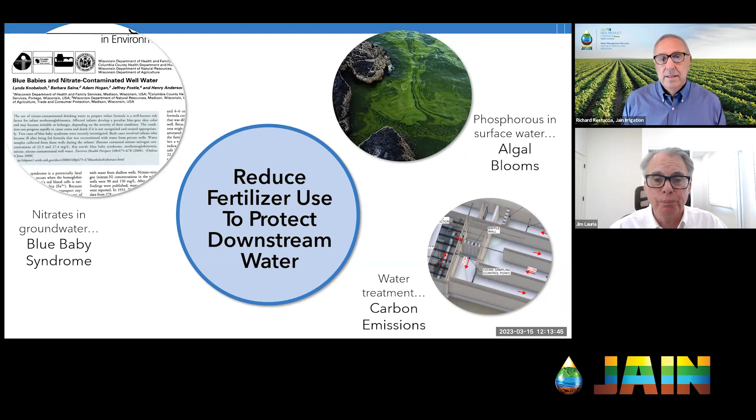So by doing what's right in the agricultural arena, you're doing a lot better job saving these kinds of things downstream, right? It's all downstream. So I think what you're saying is the cleaner we keep the water, the easier it is to clean up. Exactly. And the less expense there is to do that. Exactly, so less effort, less money, and less greenhouse gas emissions, right?

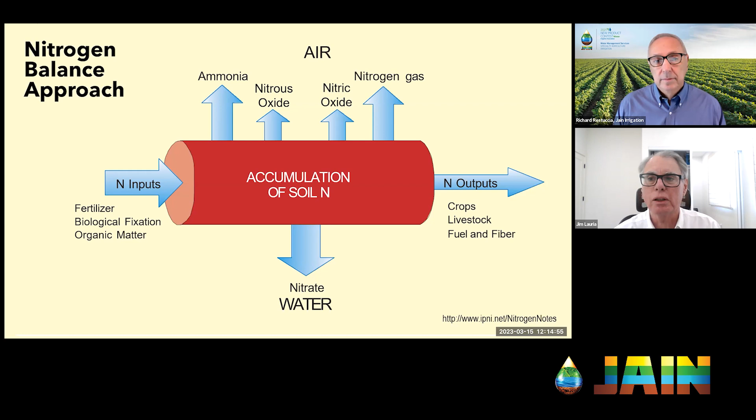So the other thing about greenhouse gases: we talked about carbon dioxide, which is by far the largest contributor to greenhouse gas emissions, but nitrogen's a pretty potent gas too. So you've got the nitrogen inputs to grow, you need that to improve the efficiency of growing, the yields, but not all of it stays in the plant. Some of it leaches out into the groundwater, and a lot of it is also released as gas via ammonia, nitrous oxide, nitric oxide, nitrogen gas. This can be pretty problematic because it's about 300 times more potent than carbon dioxide as a greenhouse gas.

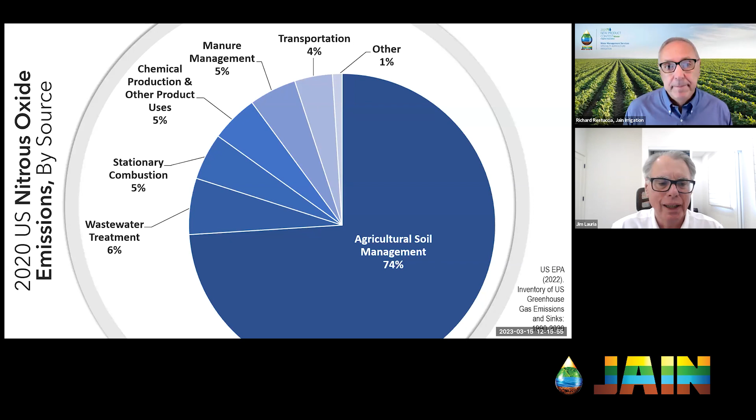So there's some effort on the use of oxygenation to really reduce the amount of nitrogen emissions. Going back to the 40s, W.D. Durrell said if we could figure out a way to efficiently oxygenate the root zones, we could really do a good job of helping reduce that nitrogen emissions.

So there's a couple of different ways to do it. Ventilation using a compressor, but that's difficult. If you're doing it dry, you don't get the distribution of the air, and it can be problematic to have a compressor out there. Chemicals, you can use hydrogen peroxide, but it's a strong oxidizing agent, so for two reasons handling it can be a little dangerous for laborers putting it into the system. But also, if you put too much in, you can end up killing some of the beneficial microbes, the bacteria that really helps with the uptake of the fertilizer nutrients.

There's nanobubble generating systems we've heard about most recently. They do a really good job of getting those small nanobubbles into water.

More suitable probably for indoor vertical farms. The equipment can be a little expensive, and also maintenance. If you've got them out in the field, they can be a little challenging to maintain.

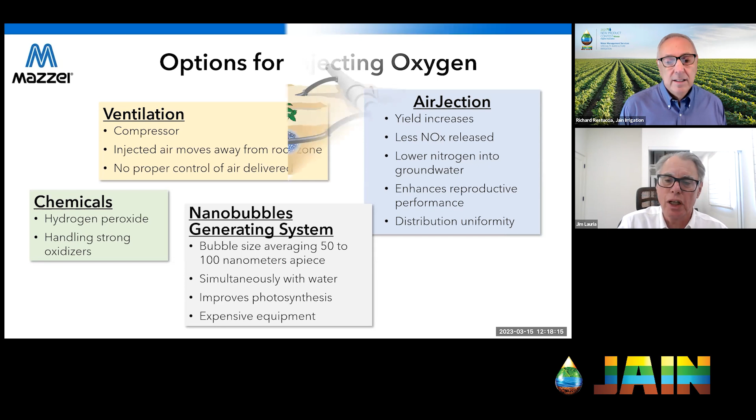And then what Mazzei promotes is AirJection. We've done a lot of work on the yield increases, reduced NOx. What we found is that by having good aerobic activity in the soil next to the root zone, you're doing two things: with the bubbles, you're breaking up the soil, so we call it plowing without a plow, but you also improve the dissolved oxygen. That helps the aerobic activity in the soil, better uptake. And also we found that it helps the nitrogen fixing bacteria become more efficient, and it's been proven that you're getting less nitrous oxide and some of the other nitrogen gases released using this.

So Jim, if I look at that slide just a little bit longer. So am I getting air injection in my irrigation just by using my Mazzei fertilizer injector? No, it's a specially designed Venturi. You want about a 10% slurry of air in there, and we design it around each flow rate compared to what you would have using a fertilizer injector. So a completely different way of doing it. We're typically doing it through manifolds to be more efficient.

It works the same way, right? Same, you're using a motive force of water to pull in, in the fertilizer case, liquid fertilizer. But when you're using air, it's a different interface. With fertilizer, it's liquid to liquid transfer. With air, it's gas to liquid. So a different technology—same technology, but a different way of doing it.

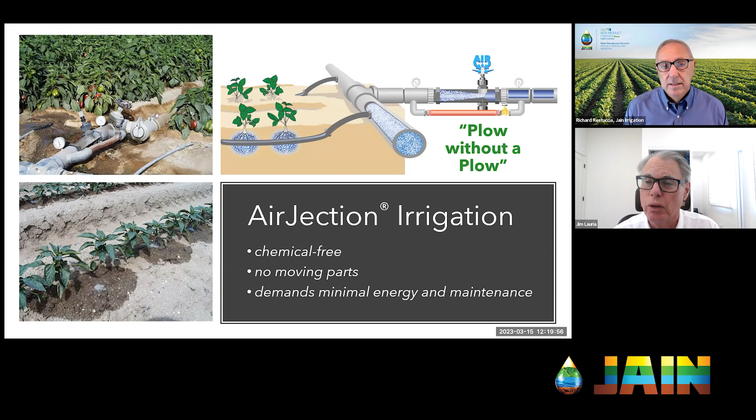And I can have both set up on my system, is that correct? Oh yeah, but you'd want to look at it—you got to look at them differently though. You would use fertilizer injectors exactly to pull in fertilizer instead of pumping it against pressure. So good advantages there. Great, thank you.

And then the other area that has an opportunity is indoor farms. We talked a little bit about that—crops that can be grown inside, will be at some point. We're looking at more tomatoes being grown indoors, green leafy vegetables, strawberries, and then one of the biggest cash crops of California is cannabis, and more of that's being grown indoors as well.

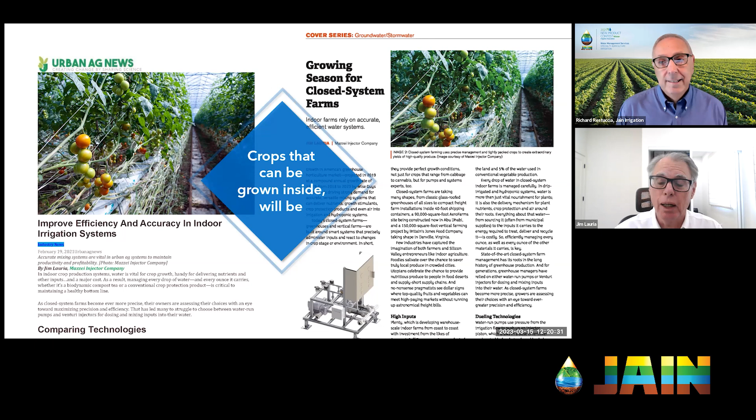So in order to properly manage the water, because you want to recycle every drop of water that's going in, there's some opportunities around designing systems like this where you've got filtration, you've got ozone. You want to definitely protect the root zones from any pathogens. And if you don't manage this water and treat it properly, you build up biofilm, which is a place that really harbors pathogens that can be really detrimental to the crops you're trying to grow indoors.

So interesting, right? They're capturing the extra water, any runoff from the plants, and feeding it back into their nutrient mix tank. Right, exactly. And you're treating with ozone for sanitizing to kill those pathogens, filtration to take out any of the big particles. So this is a design by H2O Engineering—they're one of our partners, they use our equipment in the design of their systems.

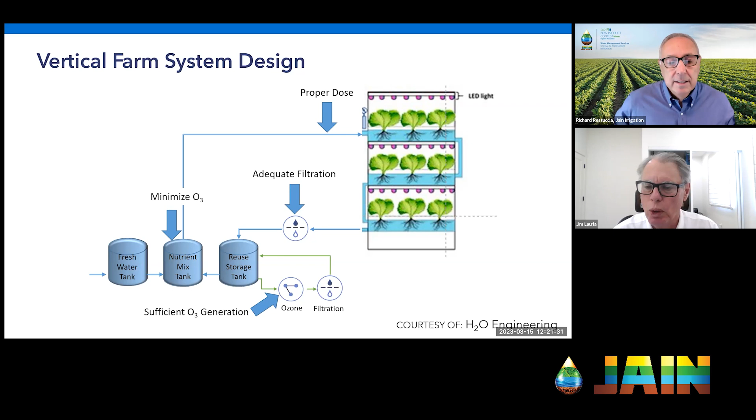Well, you can certainly see a lot of advantages for that. Yeah, exactly. And then, while vineyards are an important part of water use in ag in California, there's been some pretty stringent requirements by the state water resources about the runoff and about the wastewater coming out of the wineries, and so they're putting more pressure on them.

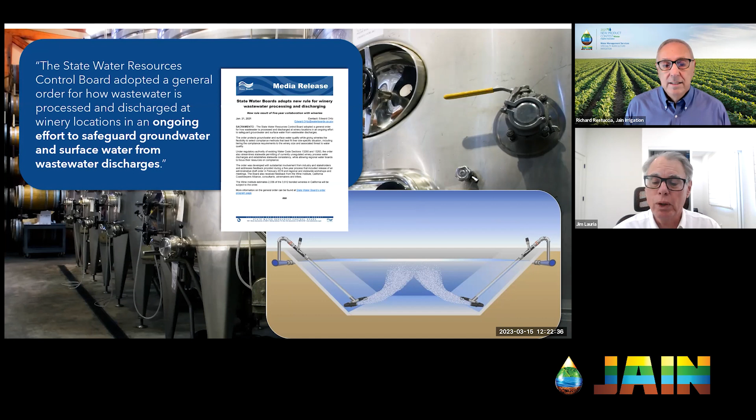And so we've got some applications where we use our Venturis to pull in air and our nozzles to do some mixing in these wastewater lagoons, again to help the aerobic activity so that you have better digestion of the wastes. And if you don't, and it turns septic and becomes anaerobic, you're releasing methane. So in terms of recycling that water and also reducing greenhouse gases, you really want to keep those lagoons aerobic, and one of the ways we can do it is with some of these injectors.

And we do a lot of work around CFD modeling, computational fluid dynamic modeling, so we can make sure the lagoons are properly mixed, that they're getting as much air in all the different areas as possible—not completely mixed, but in such a way that you've got most of the lagoon aerobically treated so that you're doing the best digestion of these organic wastes as possible.

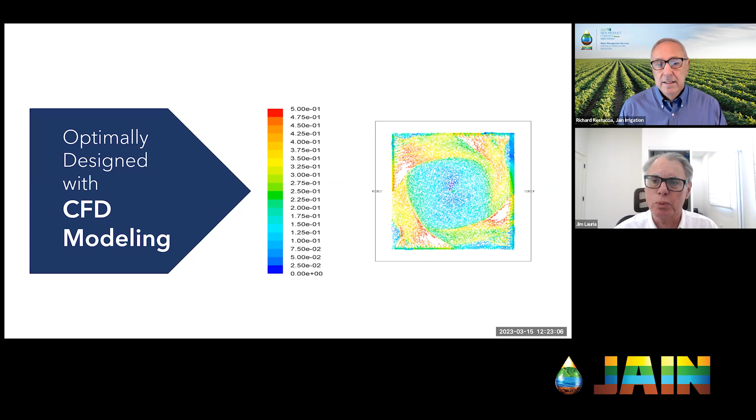Yeah, pretty interesting. Definitely in that high-tech area, right? Yeah, and we'll talk a lot more about that, the use of high-tech tools to manage some of the more simple aspects of water treatment.

Now, this is one of my favorite projects that Mazzei's been involved with, Pure Water Monterey, a groundwater replenishment project. And basically, this facility...

They wanted to, because they're on the Pacific Ocean, and this is going to be a kind of theme that we talk about going forward, as they're pulling more water up out of the ground. Monterey is unique because you've got residential people living there, a nice place to live. A lot of tourists come in during the summer. It's an agricultural community. So they're pulling water out of the aquifer.

And what's happening as you're pulling water out of an aquifer, because you're close to the Pacific Ocean, the coastline, you're getting saltwater intrusion into that aquifer as you're pulling more water out.

So this Pure Water Monterey, what they wanted to do was take a number of different wastewaters and treat them, and then put them back into the aquifer to keep some of this intrusion out, and also use this water for other applications, use it as source water for their drinking water.

And it was a tricky situation because they wanted to treat a number of different waters. They wanted to treat irrigation runoff. They wanted to treat municipal sewage. They wanted to treat water coming from a vegetable processing facility. They wanted to treat stormwater.

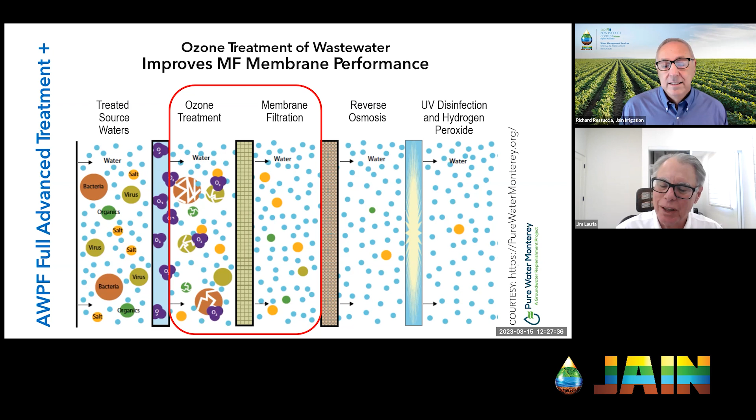I just want to remind everybody that the reason I asked Jim this is he is a chemical engineer, and he really does know this.

More and more I'm seeing places like Las Vegas or Phoenix, Arizona, where 90% of the wastewater is treated and used for ag or for drinking water. Their water rates are really cheap, right? Inexpensive, about $40 a month for a family of four versus $200 for a family of four in California. I think this is going to be part of the longer term solution to our water challenges.

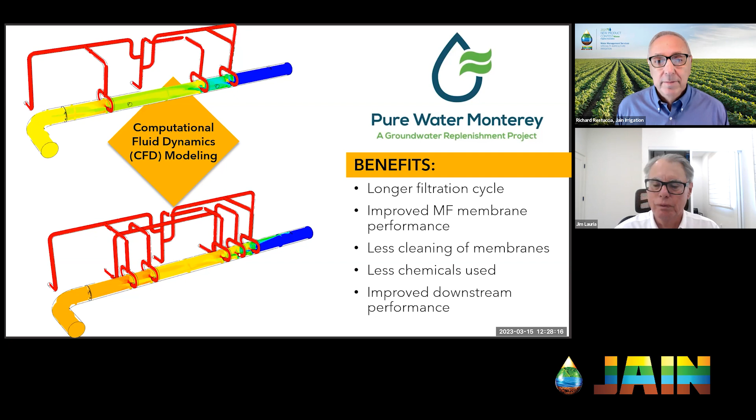As the first potable water reuse project in Northern California, it goes down into the Seaside groundwater basin, turning wastewater into a safe, dependable, and sustainable water supply. It's about 30 million gallons a day, a pretty substantial amount of water being treated. This is the equipment that was delivered by us for the ozonation process, upstream of the membranes. What a beautiful job there.

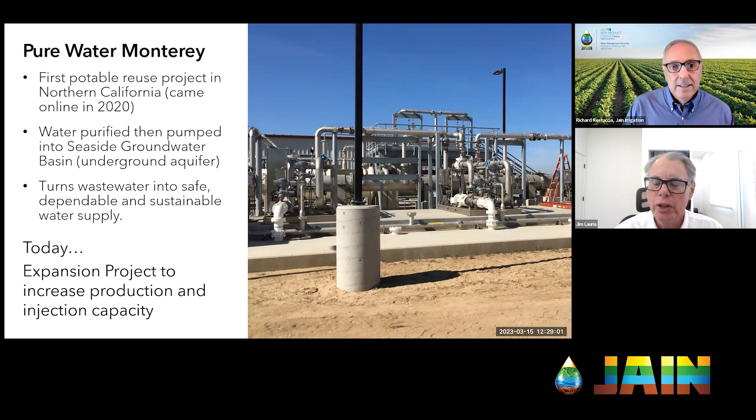There's an expansion project to increase production and injection capacity. We're already working on phase 2, trying to increase the amount of water that they can process, which is all good stuff.

Then there's Orange County. This is the largest water recycling plant. It's won all kinds of awards and has been around for quite a long time. I think presently it's about 130 million gallons a day.

Basically they're taking the municipal wastewater being produced in Orange County. They probably make about 350 million gallons a day, and of that, they take about 130 million and process it here to put it in the aquifer. The other portion they process well enough that it goes out into the Pacific Ocean.

They're trying to look at how they can do more of what they're doing with the replenishment. Again, it's a pretty sophisticated process - membranes, reverse osmosis, advanced oxidation - to make it as clean as possible so that when they bring it back up, they can turn it into fresh drinking water. It's just suitable for that. They're touting a number of almost 30% now, which is pretty great.

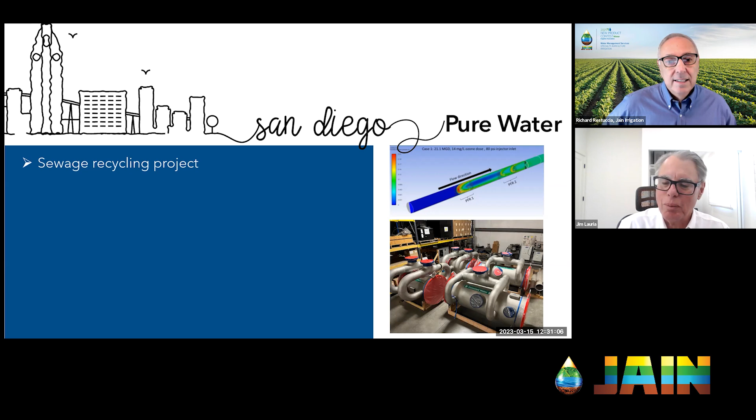But one of the things we can talk about, and one of the things I've done, right now it's doing about 34 million gallons a day of potable drinking water. We're looking at phase 2 to do 53 million gallons more. But one of the things I always like to look at is benchmarking what other people around the world are doing.

The people in Singapore have been doing some really good work around this. It's as much about the technology as it is about the communication to the general public as it is about the technology being capable of doing this.

They've had all kinds of outreach, bringing children from schools through the facility so that they grow up knowing the water's being recycled but it's clean to drink. They've got their own tap water that they bottle, branded as this treated water. So it's an education process and a communication process as much as it is about understanding the technology capable of doing this kind of treatment.

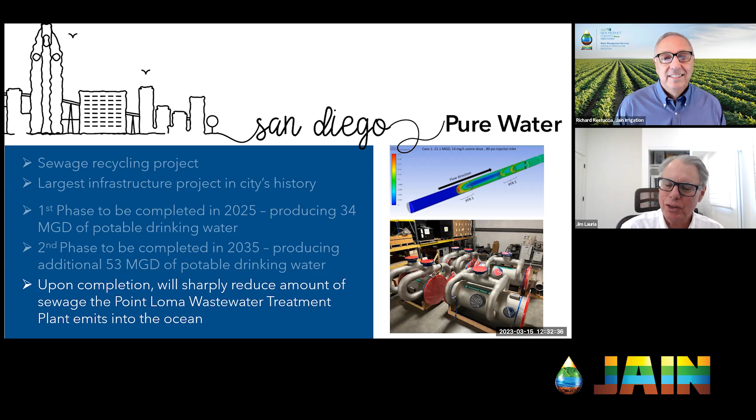We've got a question coming in from one of our viewers: do you see recycling or desalination as the primary direction in the future? Well, I love that question, right? It's a good tee up for the next one. So we've got Carlsbad that's just up the block from you, right, Richard?

Right, and they're doing 50 million gallons of drinking water daily.

Full disclosure, I've written and talked about desalination for many years. On one blog post about my views of desalination, somebody from the political left said I was an anti-green, pro-business hack only writing stuff to make money for my company. Then somebody on the political right said I was an uninformed environmentalist who really knew nothing about desalination. So I think I've got a pretty nuanced view of desal.

If you think about ocean water, it's got a lot of salt—like 25, 30, 35,000 parts per million of salt, which is an ionic particle, one of the smallest particles you need to remove. So you've got a couple of ways of doing it.

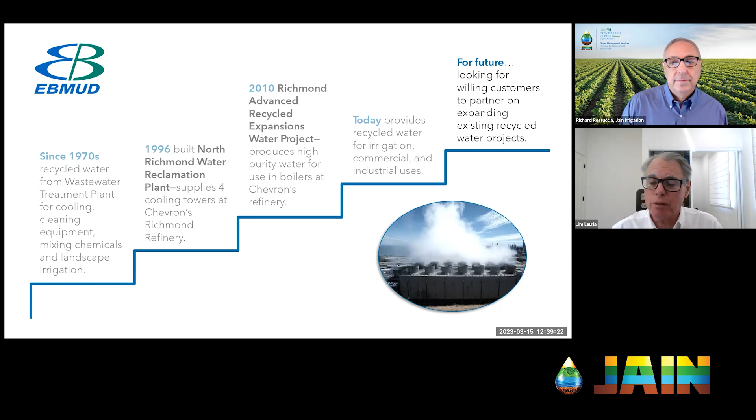And the refinery has to do some treatment as well, some reverse osmosis, some membrane treatment. Over the course of time, they've been using that water for cooling and landscape irrigation. That was in the 70s; in '96 they did the cooling towers. Then in 2010, I was involved in this project with another company to use it for boilers, which are a lot more sensitive than cooling towers, so you have to be really careful about what you put through those. And then using it for irrigation and industrial purposes. They're looking to expand that wherever they can. So it's a good way of taking that municipal wastewater, rather than turning it into drinking water or putting it into the aquifer, and actually using it in some industrial application.

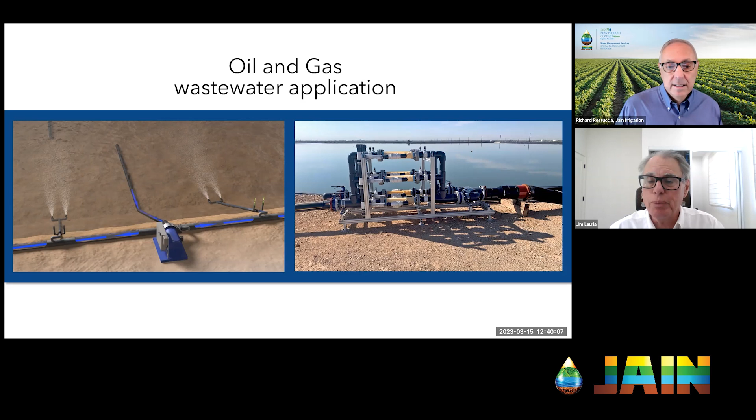And California is a huge oil and gas producing state, so there's opportunities there. On the right-hand side, you can see one of our pieces of equipment. Again, we're doing some aeration, like I mentioned, around the winery wastewater, and we're doing aeration of some of these lagoons created from the oil and gas industry. You can see a little rendering on the left-hand side of how that works, where we're using Venturis to put air bubbles into the lagoon on the bottom side, and then circulating it, as I showed before, with that computational fluid dynamic modeling system.

Very cool, very interesting technology, that's for sure. Yeah, so looking to the future, some opportunities: flood waters, stormwater, that's going to be a huge thing. We have to look at where we can supply water, but you're also going to have to treat that water before it goes into a dam or reservoir. But if you're going to look at storing it down in an aquifer, you really need to treat it beforehand so that it doesn't build up any biological contamination underneath.

And then, as I talked about with East Bay Mud and the Chevron Richmond refinery, these server farms, these computer server farms storing all the data, they need a lot of cooling water. You're moving electrons, you're generating a lot of heat, so you need to cool that. What's being looked at is, can you co-locate these server farms near wastewater facilities? So you treat the wastewater—again, you don't have to get it to drinking water standards. You have to get rid of any pathogens because you don't want to expose people to that, and you also have to get rid of any problematic organics or scaling that might cause problems with the cooling systems in these data centers. It's something that's been started, and it's getting more and more traction as people look at reducing the amount of drinking water used to cool these server farms.

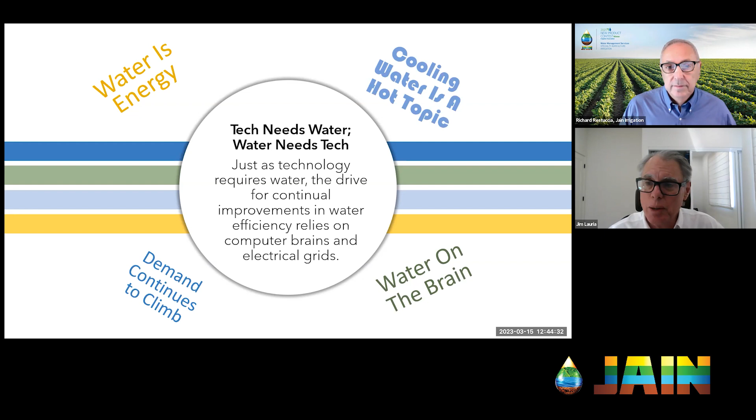At the end of the day, there's new hardware and new software to solve water and wastewater problems. I think here in California, we're very well situated for these opportunities. If you look at it, whether it's technologies, learning from other regions, or market sectors, there's really no silver bullet. So we started with gold and we ended with silver.

The point is, whether you're a big company, a small company, whether you're software or hardware, if you're in the water space, you probably have some solution for one of the sectors that California is facing and some of the challenges it looks at as far as water is concerned.

I'll tell you what's really exciting about that, Jim. One, we do have the technology. We can beat this water challenge we're experiencing with technology and with people. So that's really great news. And then the other thing, when I look at products like Jain Unity or Jain Logic from Jain Irrigation, I think this is really fun to work in and build and be a part of.

So it's not just that we're solving a water challenge. We're also creating some really cool jobs and some really interesting ways for people to improve the society in which they live. It's exciting. There's money to be made, right? The gold. But there's also the feeling that we're contributing to society and we're really achieving something for our state and for the rest of the world.